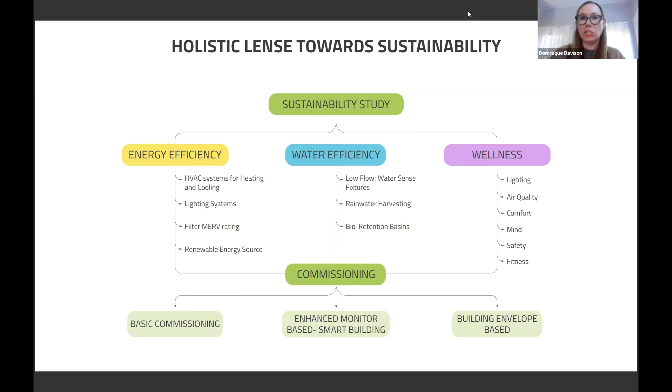So when we were looking at wellness in schools, we did this for an entire school district. We came to the conclusion of these 6 areas being incredibly important for them. The health of the air they're breathing, right, especially post-COVID. How are we providing natural light and maximizing access to that for increased ability to concentrate and enjoy their day? Fitness, how are we providing opportunities for them to move and make sure that their mind and their bodies are working in sync.

Safety, of course, is an incredibly important feature. Comfort relates also to many aspects of humidity levels, noise, and not just temperature. Mind is what we talk about when we think about calming colors and textures. How do we integrate plants? How do we make sure that we're encouraging diversity? And then air, which we talked about already.

So those are all kinds of the outcomes that we're trying to achieve, right? If we do our jobs well, then we can achieve something related to the design that helps to encourage each of those 6 areas. What we found as an architecture firm is that it's just as important how we get there to the outcome. And that we really, as a part of our design process, needed to interrogate and think about how we design, how we bring the client along, when do we have these conversations, and found, of course, that the earlier in the process, the more success we had in terms of buy-in and being able to push the envelope and get the design further towards a net zero potential target.

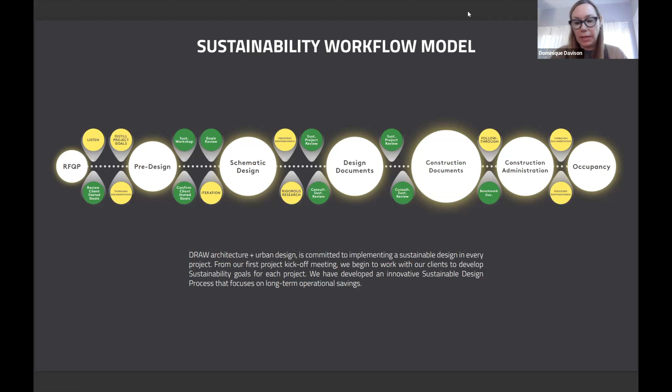So then when it comes to the process of what we did on this project specifically, this was an existing school, or the 10 different schools actually that we were doing an analysis for. You always need to start with the existing conditions and understanding what the envelope, the systems, all of that are. And so we created a baseline based on IES PNNL prototype school energy modeling scorecard models.

And then once we had that baseline, we were able to accurately look at forecasting improved scenarios for them. And that's where we brought in the Planet Impact software. We looked also at water efficiency as an important goal. And we decided that it would be most beneficial to give them a good, better, best kind of scenario, so they could know, if they just were able to do a smaller investment now, what could they achieve? A larger investment would get them further along. And then what is the final investment they would need to make to get to net zero?

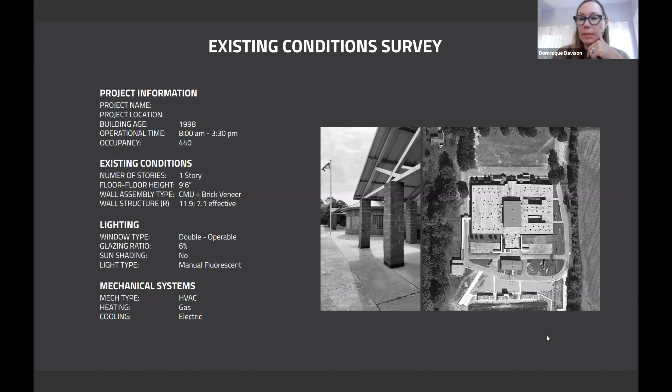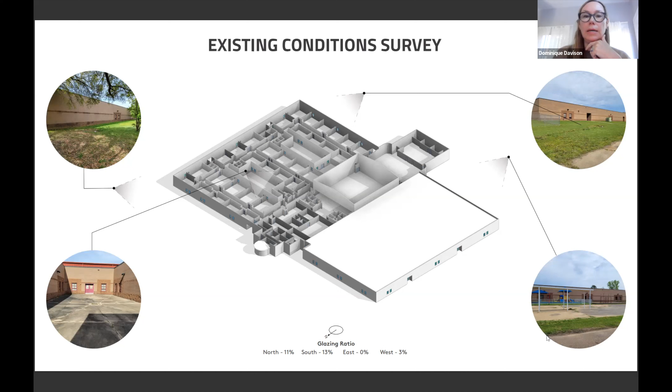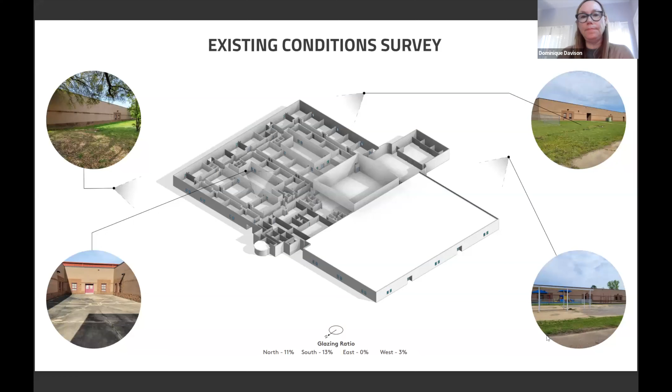So here's an example of the existing conditions survey. We went to the schools, we measured, we documented. Here's just an example of a very typical kind of school that you might see, so I won't spend too much time on this. And then we analyze things like the glazing ratios. Window to wall area ratios are very important in terms of energy use, daylight, the lighting internal to the building, wellness, and all of those factors that we talked about previously as being important criteria for us. And this particular building had a very, very low window to wall area ratio, which is challenging.

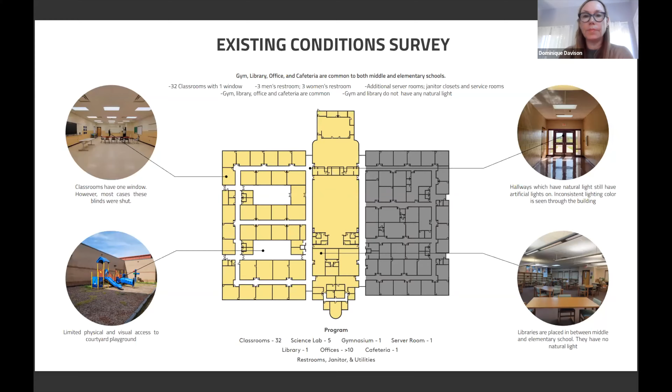So in reviewing the interior conditions, we also looked at things like color temperature of lights, what kinds of lights did they have? Of course, we looked at the systems, and the kinds of materials that existed on the interior as well, and the quality of them. So here are just some more images of the existing building, and the toilets and things like that were in need of replacement already. So that was good. That's always a good time to catch one of these projects so that you can have a better return on investment in terms of water efficient fixtures.

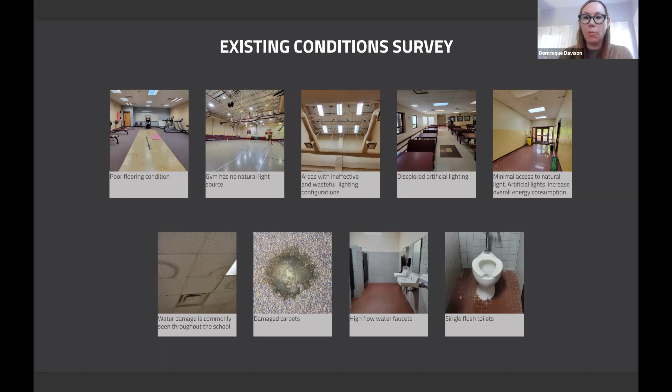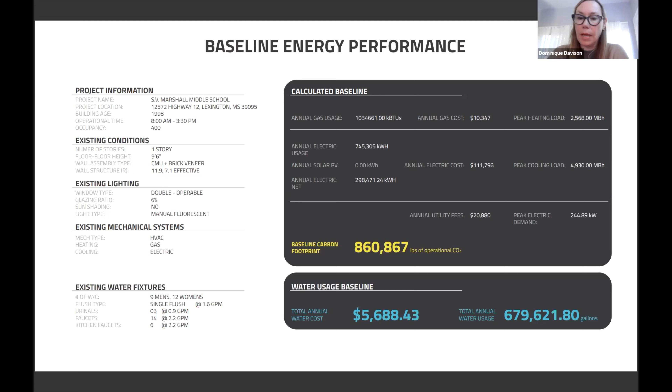So in terms of the outcome of the Planet Impact analysis, we started first with this baseline calculation, and we found 860,000 pounds of carbon as part of their operational CO2 emissions, and in terms of water usage, about 680,000 gallons of water annually. And then when we looked at the good, better, best scenarios, these were the recommendations for this particular school. If we just upgraded the HVAC, we could get to about a 20% efficiency, and that lowered the annual energy cost pretty significantly. But it was still at 120,000, and there was a payback that was pretty quick and almost a no-brainer, right? 3.6 years.

When we started to look at the exterior, if we increase glazing, if we improve daylighting, if we put in some better lighting, like solar harvesting systems and sensors, and look at shading where the shading is needed, better insulation, etc., there we were able to reduce the total energy very significantly to 72%. And that reduced the energy costs even more, still with a very reasonable payback.

And then once we'd done everything we thought was reasonable to the exterior envelope of the building, making the building as energy efficient as it can be and the systems as efficient as they can be, then we look as the last resort to solar PV arrays, which in this particular climate do make sense where the school was located. And we were able to fill that gap of the final 28% in order to get to 100% net energy production.

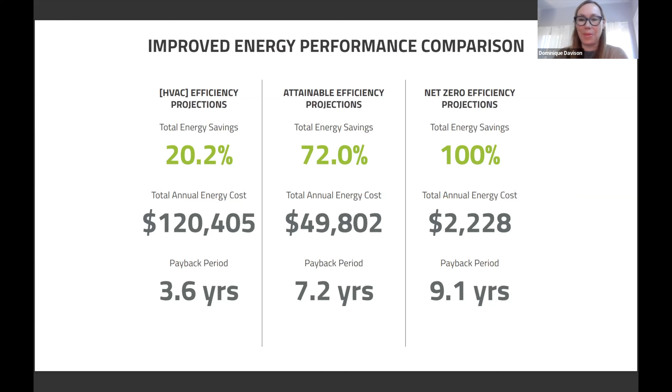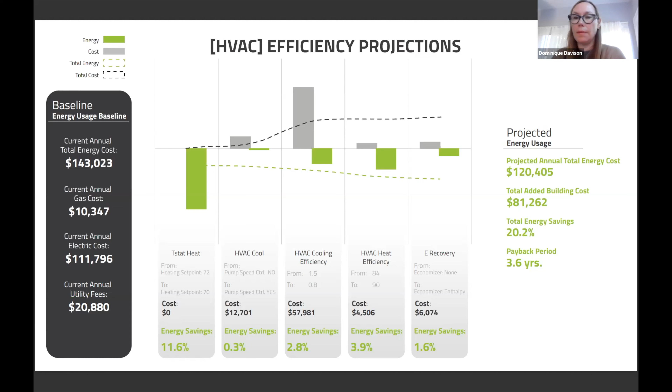So here's the analysis of the kinds of output that the Planet Impact software provides. And so it breaks it down by the different elements, right? One of the things was also T-stat heat, setting the occupancy to make more sense in terms of also the thermostat settings. And we looked at more efficient systems and how that all kind of accumulated to achieve the goals that we had. And this is the good option, right?

So everything below the line, right, is a reduction, and everything above the line is an increase. So you can see in the key to the left, just to clarify, that green is energy and gray is cost. And then the dotted line is the cumulative over all of the elements as they're added up together.

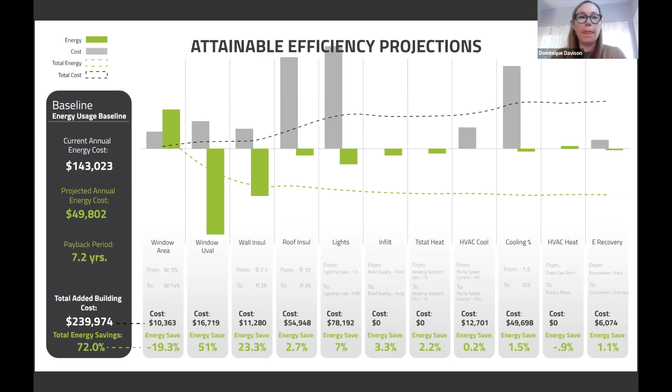So the things that we did were increase the window area, have better glazing for all windows, the new as well as the existing. Much improved lighting systems. The lights were not yet updated to LEDs or even the better efficiency fluorescents.

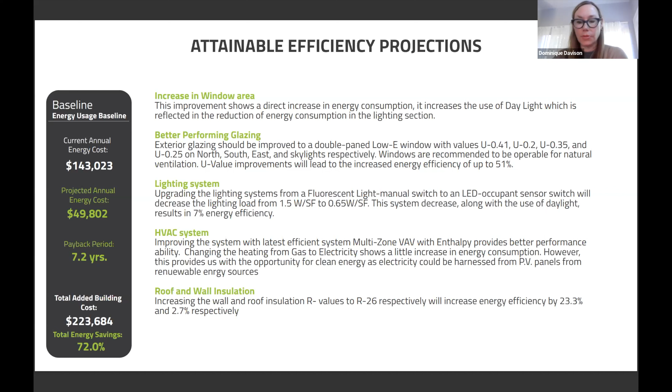HVAC. We went with a multi-zone VAV and with enthalpy, which provided much better efficiency. And then, of course, going from a gas to electric system is very important in order to achieve net zero. So that was key. And then the roof and wall insulation also were pretty significant.

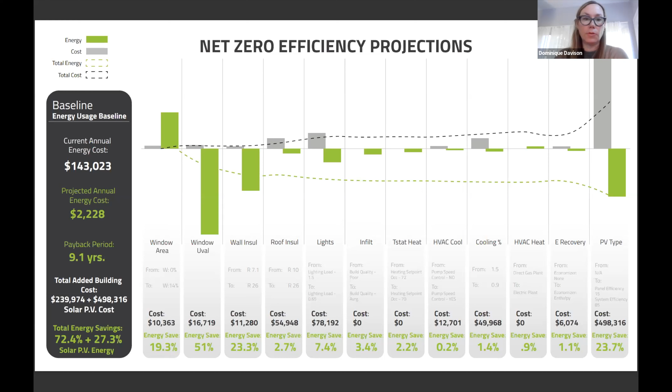Then with the net zero, again, all of those same steps were taken, but we added the solar PV. And here, the total cost for that system in order to get to that net zero was about $500,000. There are grants available currently through the federal government for schools. So this is a very good time for schools to be making these kinds of improvements. And again, this just describes everything that we did in the kind of summary of all of the improvements and the payback.

Also looking at heat island effect, that's a really important component of this, right? When we add the PV panels to the roof, it significantly helps the performance of the building too, given the climate.

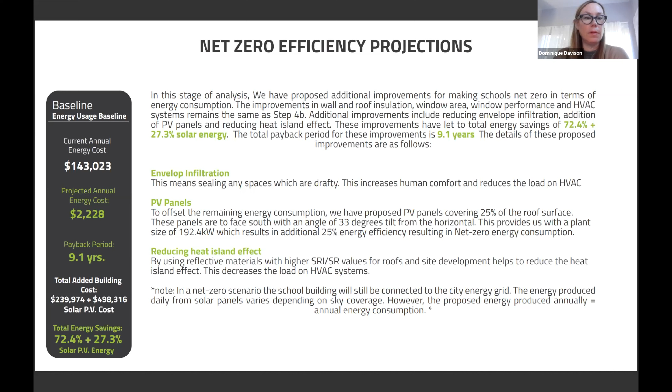And we looked at water efficiency. So for this particular building, we were able to reduce the water usage to 275,000 gallons, very significant reduction, about 38% total. We did not do water collection or recovery at this time, but ideally that would be another component that we could look at and analyze, and Planet Impact does look at that component as well for how to get to net zero water usage.

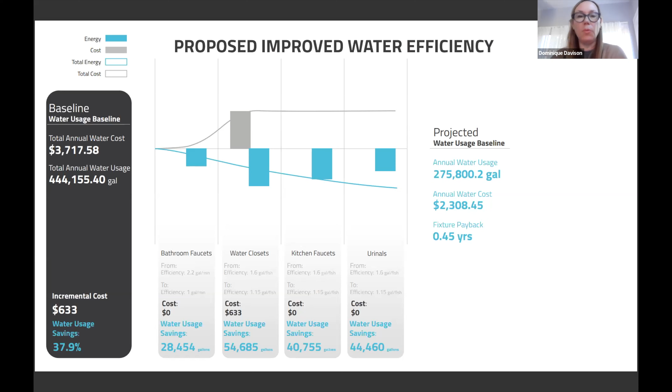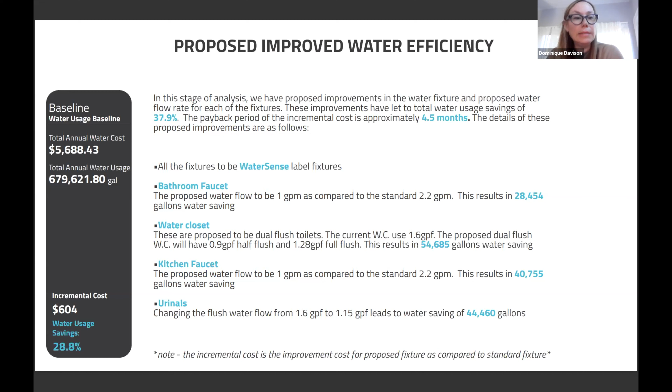So we did things like all fixtures to be WaterSense labeled fixtures, bathroom faucets, just adding aerators in order to go to 1 gallon per minute as opposed to the 2.2. These are pretty outdated toilets, so everything was still 1.6, if not more, gallons per flush. And we also looked at all the other fixtures as well in order to lower the water usage. And all of this is calculated per the LEED standard for water efficiency.

And then finally, our recommendations also for commissioning in terms of what additional steps can be taken. So we see net zero as really a 4-step process, right? It's how efficiently can we design it? How can we use the renewables then? But then how do we look at the operations? And then finally, the monitoring long-term in terms of smart buildings.

How do we make sure that the client or the owner is able to very intelligently understand the mechanisms by which their building operates, and how they can then make intelligent decisions about how they might change how they operate the building. I think too often we don't have that kind of insight, that clarity of how our building is working until a month later when we get that utility bill, and then it's already too late.

For example, we had a toilet running in our own office, and we didn't find out about it for 28 days because it happened right at the point of our utility bill changing over. And next thing you know, we had a $1,400 water bill due to a running toilet. And so for some of these commercial toilets, it can be pretty staggering, the amount of water waste that happens, or a lot of it's pipes that just aren't operating correctly, that sort of thing.

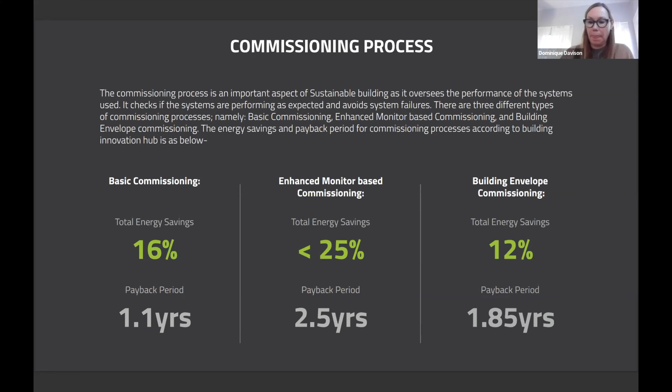Well, Dominique, thank you very much for this most interesting presentation. I have a couple of questions, and in the Q&A, there is something here. The first one is, is environmental printing considered for banners, posters, and so on?

For our projects, we weren't so much looking at that. That wasn't a focus. We were looking more at the operational carbon impact. And so that would be more of maybe an embodied carbon question. But yeah, thanks for the question.

Okay. Then another one here. Question was, how long did the whole project take? So I want to say it took about 5 months for us to analyze the buildings, create the baselines. That took a little longer than it could have, just because of access to the existing utility data. That just took some time to figure out. If the client has their existing utility data handy and ready to go and can share that with you, then that could go quite a bit quicker to create the baseline.

And then doing the analysis and having a third party kind of review and verify it, it took probably another few weeks. So overall, I think each building you could do in a month.